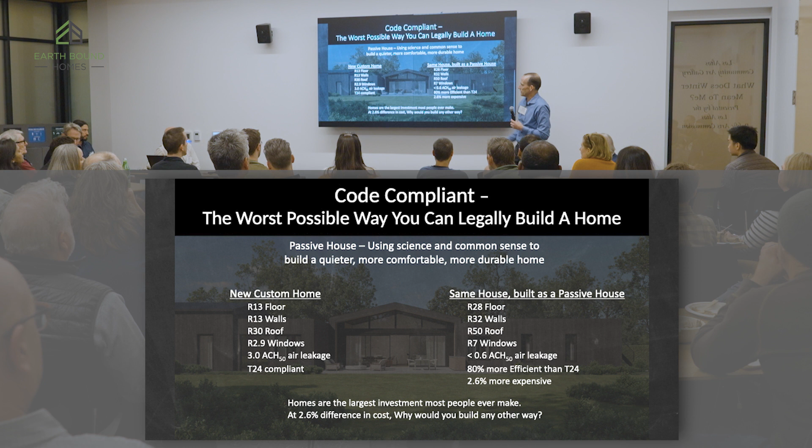Now, this is San Bruno, and I'd say a proportion of our projects now are all electric. And I don't like this - this terrifies me, all this terrifies me. We should be building better.

I know that the Supreme Court just knocked down the all-electric mandate for cities, but that doesn't mean we can't have these conversations with our clients, with our architects, all the time. Talk about it all the time. We don't have any of these conversations with gas combustion.

So we builders have been constantly taught that we're supposed to do what the architects and engineers tell us to do. An architect told me he likes that I don't do what every other builder does - I second guess every part of the construction process. In my opinion, if we want to change how we build and the impact we have on the environment, we have to question everything.

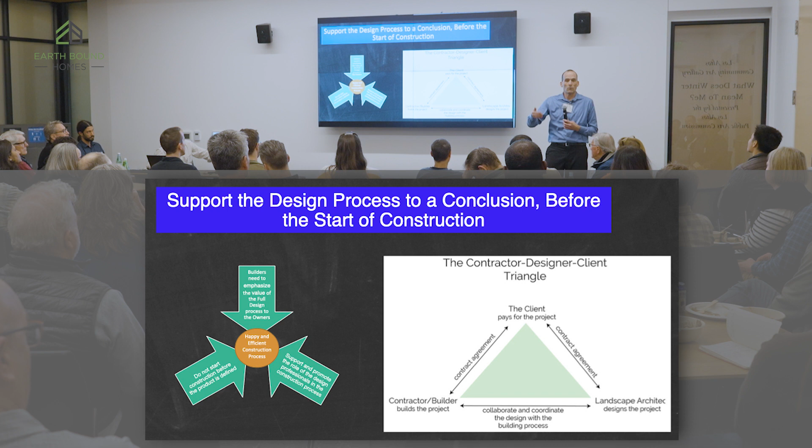It all starts with having these conversations way before construction begins - pre-construction. This is when the architects and engineers are doing all the heavy lifting, and this should be when your clients are making these decisions. If you do it later, it's too late - it costs the client too much money and takes too long. These are two different jobs.

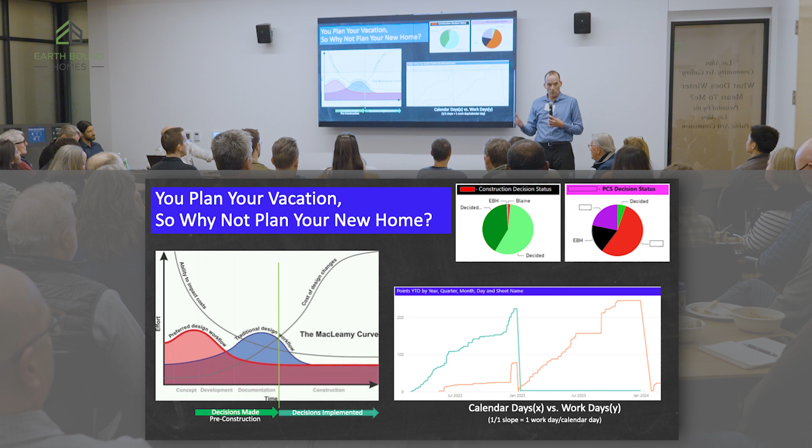Now I'm going to talk a little bit about passive house, and a little bit about the Living Building Challenge. I'm trained in both and strongly believe in those systems, but I don't strongly believe in rigorous adherence to any one system. I believe we can build better projects without getting them certified and spending that money.

This is serious money - we could use it for better windows, better insulation, or better air sealing instead of certification. I'm not saying certification doesn't have its place. What I'm saying is we need to get away from this adherence to certification, or it doesn't mean anything, and concentrate on what we're actually building.

Building better projects is what really matters, and educating our clients - they have options, like upgrading windows to better windows. That's what matters, what we're producing, because certification is just a proof of concept. If your client wants to pay for it, awesome - we're super happy. But we'd rather see you do better projects.

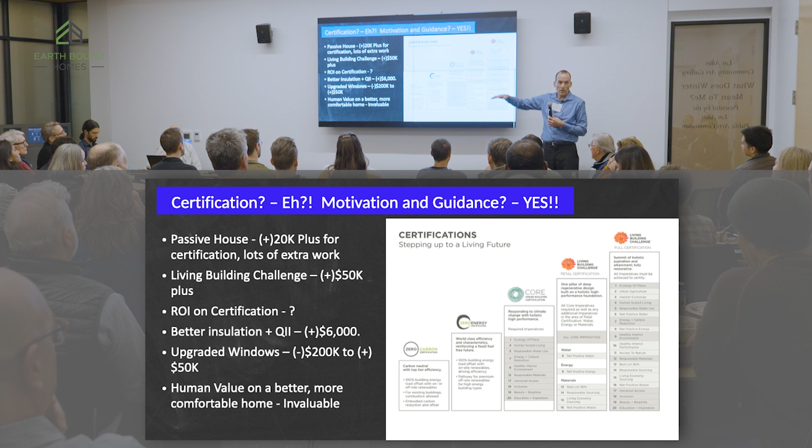There are lots and lots of certifications you can get. This is just the certifications for Living Building Challenge - about 5 of them, and this is the hardest standard in the world. This should be the goal: the best project that your client wants, can afford, and wants to live in, and the best for the planet.

All right, this is my little dinky house. Until you've been in one, you don't really know what it means. Until you've been in a passive house, you don't know. So I'm just asking you to kind of believe in what I'm saying.

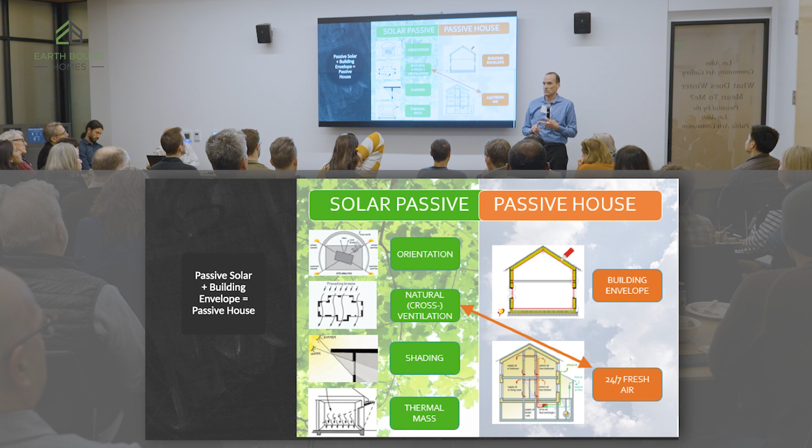Passive house, capital P capital H, is not solar passive or passive solar - it's different. It's solar passive or passive solar with a much better envelope and a fresh air system. It's about an entire organizational structure that looks to build a quiet, comfortable, durable, long-lasting, energy-efficient house that provides fresh air and is resilient to fires, smog, and everything that attacks us in our air.

This is basically about really efficient windows, a really efficient envelope, making sure that you supply fresh air to that house, and having a ventilation system that transfers air. A ventilation system can be opening a window, but opening a window is 100% inefficient at retaining hot or cold air depending on the season. With an HRV, which I'll get to at the end of the talk, it's about changing out the stale indoor air and bringing in fresh air, but pulling the heat so you're not essentially opening the window and losing all that conditioned air you've built.

So this is the Cereza passive house. One of the most important things about any passive house is an air barrier. There's essentially a pencil test: we should be able to draw a pencil all the way around your house without ever lifting it up off the page. That's how you get an air seal.

This is the waterproofing for the basement. David, or Anthony, mentioned earlier that the site of this house has a high water table. We basically have to build the foundation so that it could float, right? And it's too heavy to float, but it literally could have water on the walls the whole time. We're not allowed to pump it off.

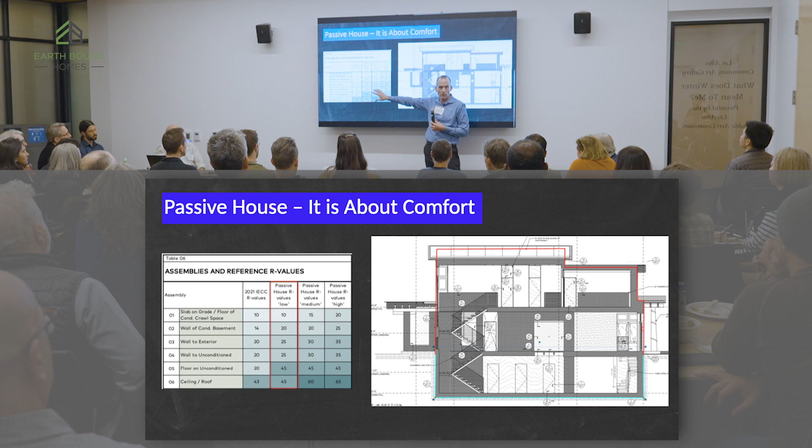I hate Title 24. Title 24 is a complete disaster. With Title 24 for this project, we have a 6.11% compliance margin over Title 24, because Title 24 doesn't understand passive house. It happens over and over that when we do the Title 24 calculations, it doesn't understand what we're building and gives us bad margins. We're having to do stupid things to get past Title 24.

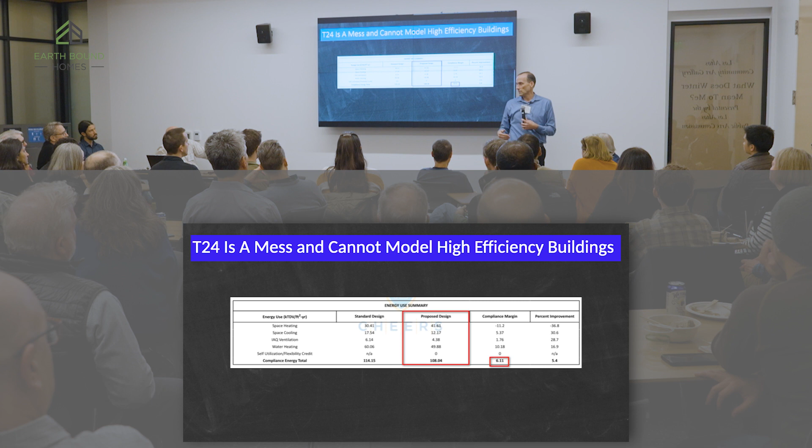What we should be using is something called PHPP, the passive house planning package. It'll give us our loads and tell us how we're in compliance. There's a company out of Colorado called EVU who did the training for me and for all of my people in passive house training. They do something called a boost report—it's like $2,000 to $4,000—that will do the PHPP and give you the whole analysis. I'll show you some of their output later on. It's fantastic, absolutely fantastic. This house performs unbelievably; I'll get to it.

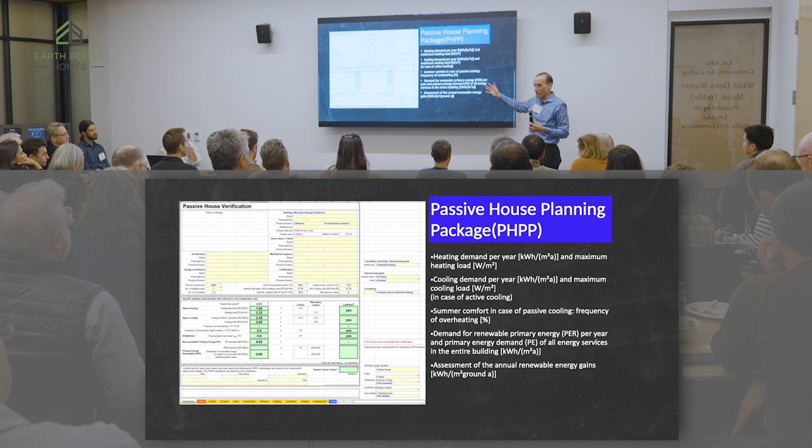So this is like a dream, right? These are the houses that we want to be building. Can we get up and hand out the slides? I strongly believe in active learning, and we're going to do something that Bronwyn and John Stewart did a couple months ago—an active learning session. For about the next 6 or 7 minutes, you're going to get a version of this slide.

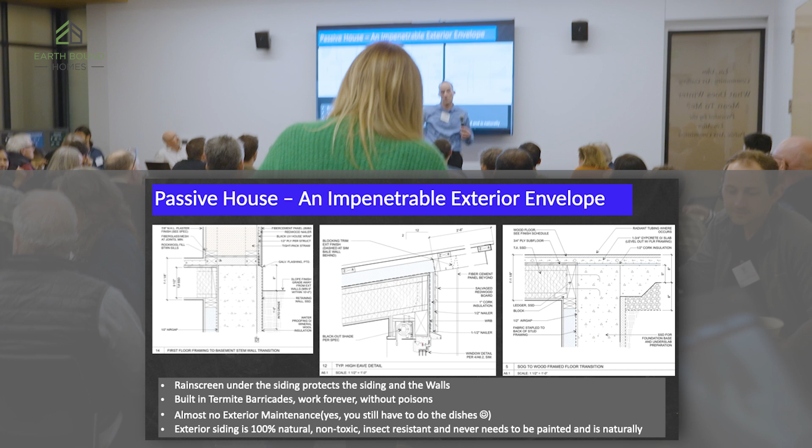What I want you to do is twofold: draw down with the pen on your table the air barrier, so that you stop air from flowing from outside to inside your house. Then draw the shortest line between the outside and inside thermally—what you're looking for is bypasses of your insulation, called a thermal bridge. Does everybody understand that? The reason you're all sitting at tables is so you could talk about it.

Let's talk in class—this is really, really important. This is how you define what floors, walls, or foundations matter most. In this case, we have it going across the interface, because is this a basement or is that a crawl space? The basement is about a wood wall, and here we're up with a wood wall or a crawl space, so this has to go all the way down into the dirt. At some point it connects with the concrete waterproofing below, and it goes up past this junction. I can tell you from experience, this junction is incredibly difficult to intersect—it always leaks, and in a remodel it's a total pain.

This one, we're coming up and then coming over. Why do we place it here? We place it here because look at this—this is a vaulted ceiling. What do we know about vaulted ceilings when we have insulation in the roof? We have to protect the underside, the outside of the air barrier, from getting cold, because if moist air travels up through here and hits this membrane, and this is outside, it will condense, water will condense, and the drain will get wet and rot. So it has to be here. For those of you who said it's going to be up here, you're going to let your membrane get wet from the condensation, and everything below it will rot out.

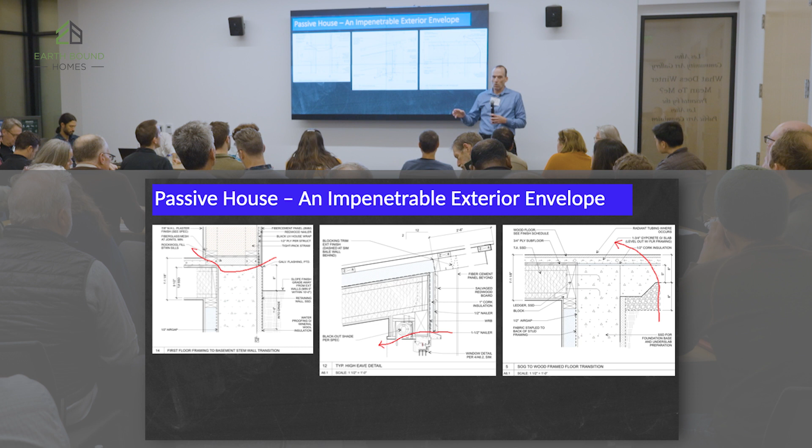It's a stinker because we have our window, our structural header, we have to have a structural header. We have our blinds pocket inside the wall that gives us a straight shot right through our structural lumber and those blind pockets. Blind pockets are really, really hard to get right. If you put a blind in a wall and you don't have exterior rigid insulation that goes over the top of it, then you're going to get thermal bypass. And anytime you have flashing, this is just a super difficult variant.

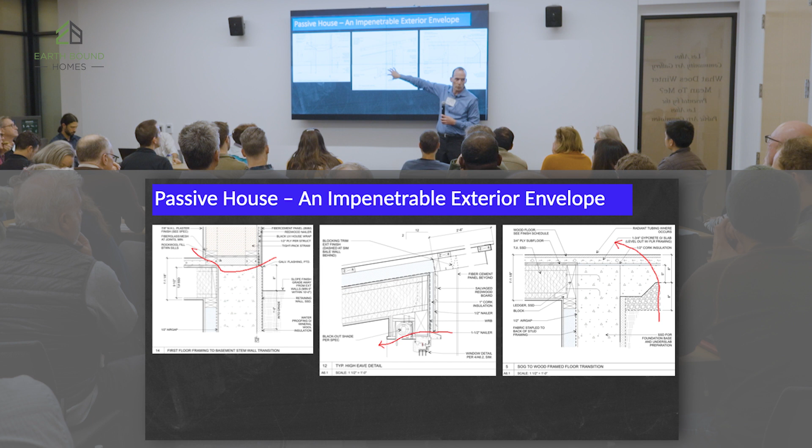It's always hard. And then the last one, we have a thermal bypass right here, pure and simple. So we do have cork insulation, but this is the weakest spot, right? We insulated this, so heat has trouble getting through to the basement, but getting upstairs, it only has to go through a half-inch of cork, right? What's the solution to that? Insulating the bottom of this slab.

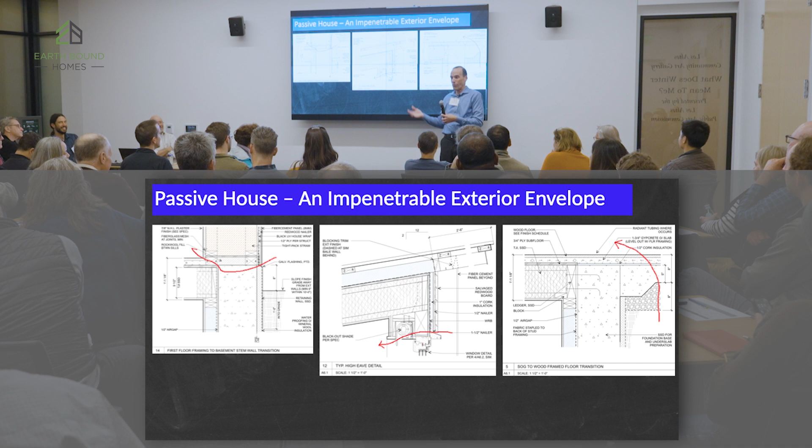So actually I drew it on the slide before. I drew the insulation under the slab because I didn't verify it. But yeah, this is hard. We have to think about each one of these details, and like I mentioned earlier, every job is a prototype. Every job gets a little bit better. Our first passive house, we struggled mightily. Our second, better. Our third, better. Next slide, please. Don't expect to get everything right the first time.

Okay. This is the Living Building Challenge. I love the Living Building Challenge. It's basically impossible for any infill project. To get full Living Building Challenge, you have to be water independent. Forget about it, right? You're not even allowed to collect water in some places. And even if you did, you'd have to put a giant tank underneath your house to collect it all, okay?

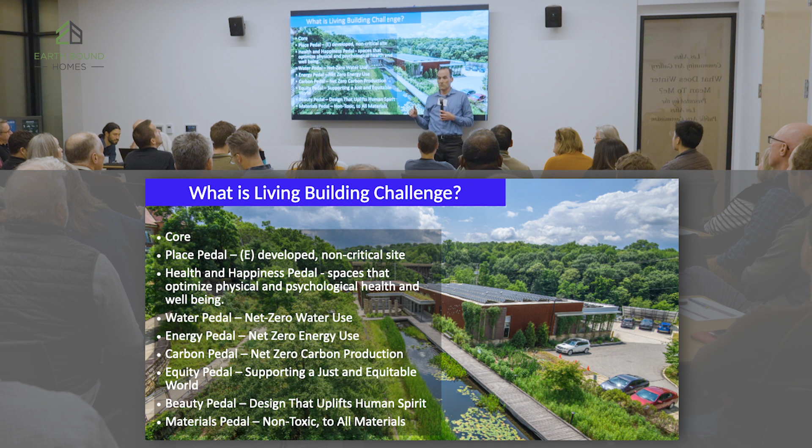So we have an intern who is a fantastic human being, and last year she built a tool for us to look at all of the materials we're using in our company and see if they had red list chemicals. This is a lot of work. So not only is the tool absolutely awesome, but some of this stuff, like Rust-Oleum, we got all these other products, and this Rust-Oleum pops out as high red list chemicals. It's a toxic chemical.

One of the most surprising, for you structural engineers and builders, is SET epoxy, which is the epoxy they use to anchor hold downs into concrete. It's like 40 to 60% red list chemical. Think about that. 40 to 60% toxic chemical. And I would talk to Anthony or any of my other structural engineers. I don't know if there's an alternate material. I would love to use another material that doesn't introduce 40 to 60% red list chemicals in our products. Next slide.

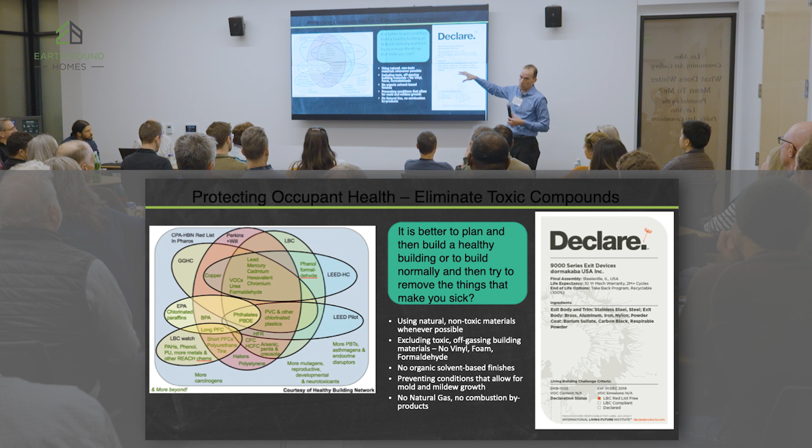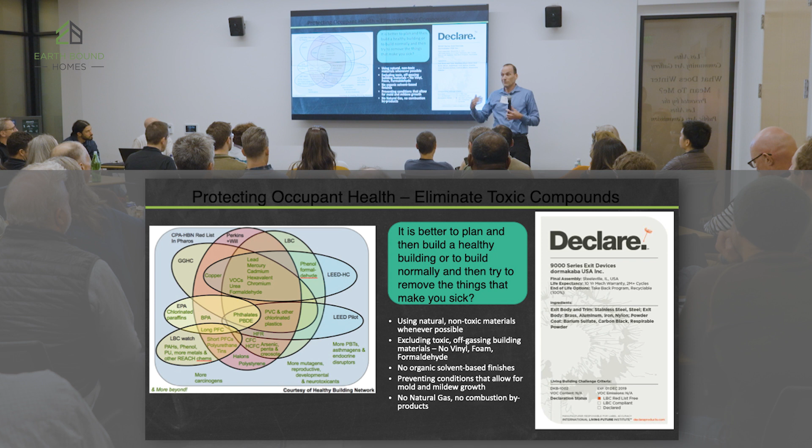It is a lot of work. Somebody the other day goes, why are we responsible for doing this? Nobody else is doing it, right? Because there's a need and we need to do it.

Next slide. The red list, if you're not familiar, is the Living Building Challenge way to certify materials for toxic chemicals. It's like 21 families, about 11,000 chemicals, and growing every year. We can look them up through CAS numbers. That's what the tool does. We have the tool on our website, but I didn't like how it works, so we're going to try to rebuild it and make it easier. Let's put that back up.

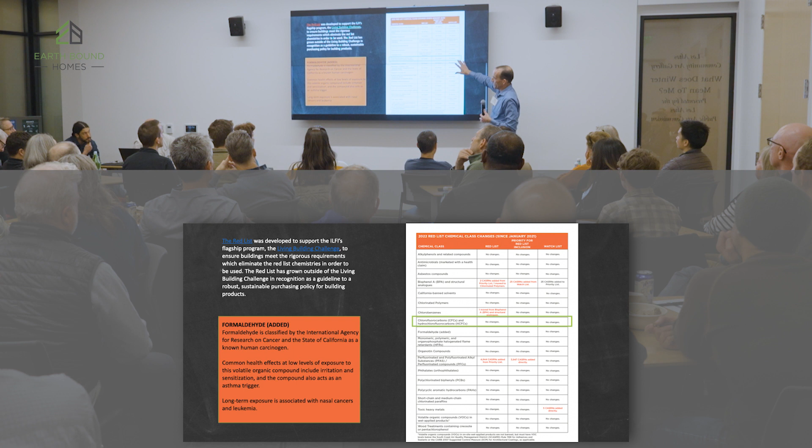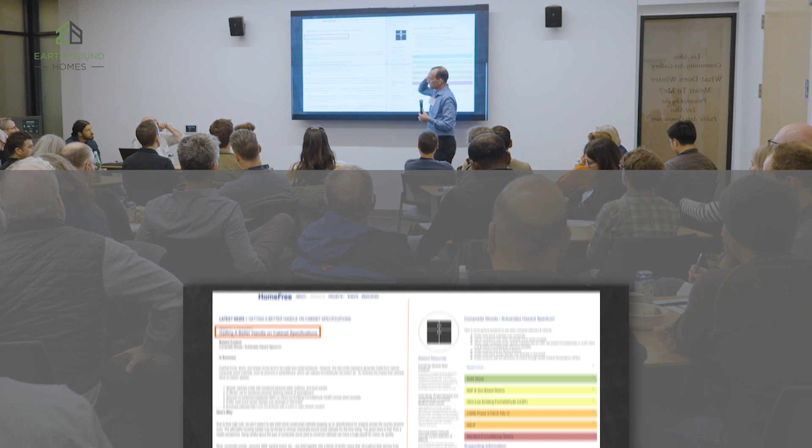Next slide. You can also go to websites like HomeFree, like Mindful Materials. These are great websites for looking up materials. Mindful Materials, unfortunately, is mostly commercial materials. I'm a bit bummed. HomeFree is actually better. They've done a great job. Next slide. You look up a section, for composite woods, and they give you basically green, which is good, all the way to red, which is bad. Very easily. So if you click on this next slide, it'll give you this list.

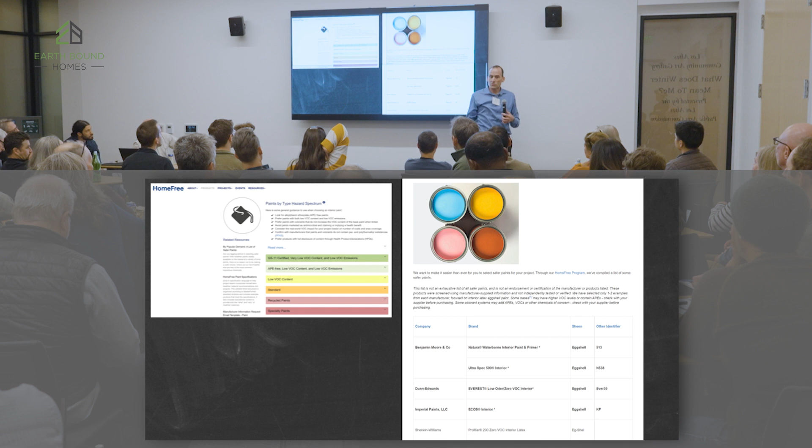So click on this green, it gives me this, and these are the ones that are actually good for you. So right now, very easily, if you go to this website and say I want to use a paint, I can say, oh, this paint fits this good green category, right? There's resources out there. They don't cover a lot. Next slide. And they require a lot of work.

You have to be willing to talk to other people. You have to be willing to share resources. We're trying to aggregate. We're one small company. We're doing everything we can to put this information out there, but it's a lot. But you also have to, to quote Apple, think different. You have to go into every step and question what you're doing, why you're doing it, and if it's the best way. So this is the first time when we went, why are we using pressure-treated lumber for the retainment for these temporary walls?

Yes, it's called soldier beam shoring. But why are we using pressure-treated lumber? Pressure-treated lumber is so that the lumber doesn't rot out and turn to mulch. But you're leaving it in the ground. You just basically leave it in the ground and it rots out. You want it to rot out, right? You want this to be just mulch in 10 years, right?

And if you put PT in here, modern-day PTs are water-soluble. So we have water-soluble chemicals that we're now putting into an area with a high water table that are going to leach out of that wood forever, poisoning the ground around this house. We can do better. And this wood is cheaper, right? Why did I never think of that before? This is not rocket science. This is just paying attention to things that we just didn't think about before.

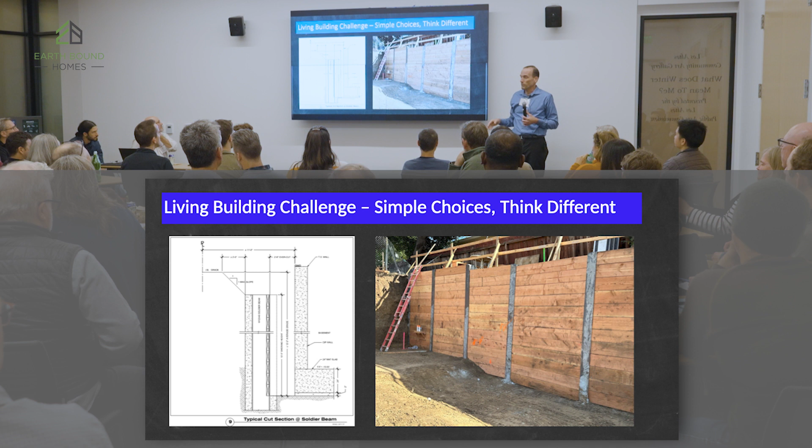Here's another one. Everybody knows, or at least if you don't, you will right now, PVC is toxic. The manufacture, the disposal, and the burning of PVC produces a chemical called dioxin. Dioxin is one of the most potent toxins known to man. And we put it throughout our houses in sprinkler systems, and we have water sitting in these sprinkler systems for eons, leaching the chemicals out of this.

What's the alternative to this? Copper systems, right? We have started to introduce copper fire sprinkler systems. It's about a 20% increase in the fire sprinkler system price. Very easy to get rid of a toxic chemical out of our projects without introducing anything except a little bit more investment in a fire sprinkler system, which is already like cheap insurance, right? Just thinking a little bit different. Next slide.

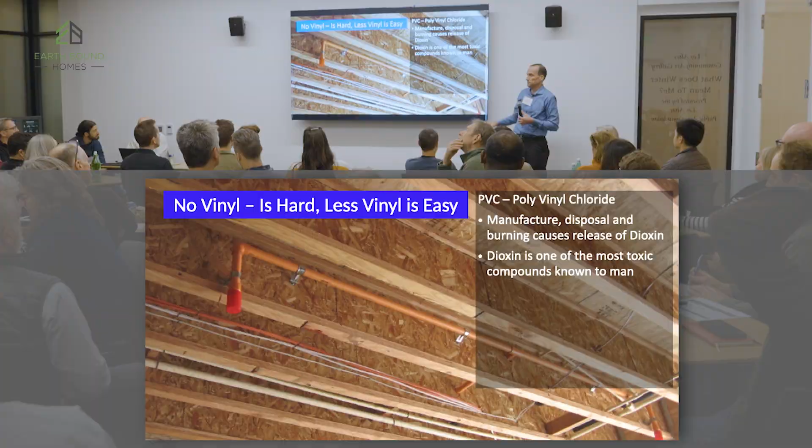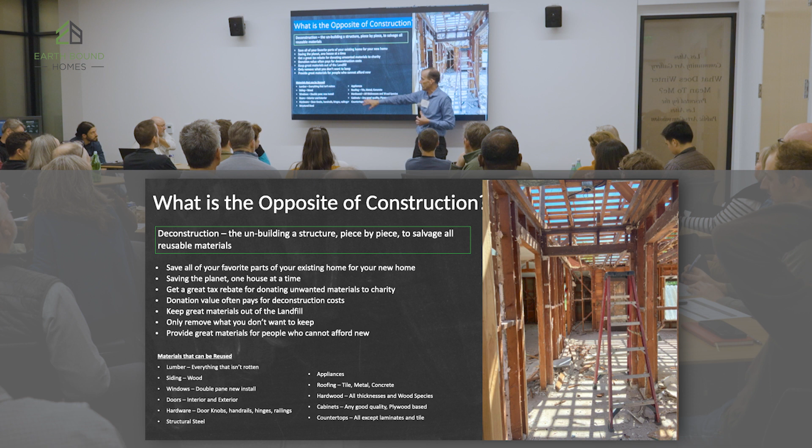So first we planned, now we built. So what about this project is so amazing, Mike Clay? First of all, deconstruction. The City of Palo Alto requires deconstruction, which means that you don't get to drive an excavator or a bulldozer into the front yard and drive it out the backyard with a dump truck, right? So you have to take it apart piece by piece. There's a lot of materials here that you can recycle. Next slide.

The labor to deconstruct costs about twice as much as the labor to demo and the dumping costs, right? So what do we do? How do we make this a better process? On this project, and on subsequent and previous projects, what we do is, first of all, call an appraiser and say, hey, is there anything of value in this house? And if they say yes, then we tag it, we have a deconstruction company pull it, and then we donate it to a deconstruction salvage company, which then gives us a tax break on that material.

If they say no, then we call a company called Full House Building Supply. Full House Building Supply will come in and go, yeah, I can do this. Then they'll go around, take pictures, and have a sale. The owners are out of the house, so they're not coming in while the owners are there saying, no, I want that TV. They're coming in and basically selling it for fractions of a dollar, all the stuff in the house that anybody wants.

People come in and take it, they sign a waiver so that you're not liable if they get hurt. They take all the stuff, and what you're left with is the stuff that nobody values. There's value, but not value to anybody in this area. So now you've reduced the amount of deconstruction material you have to take down, the deconstruction bill goes down, and you've disposed of less. Next slide. So what does that mean?

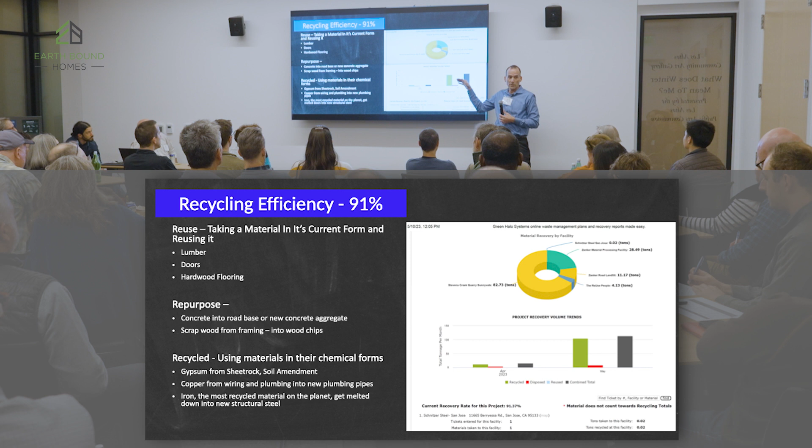91% of that house was salvaged or reused. 91%, that's including the foundation. 9% of that house went into landfill. We took it from 100% into the landfill to 9% into the landfill. That's a freaking good deal for the environment and for the climate and for the population in general. Next slide.

So Anthony talked a little bit about it. We have been using a 70% replacement concrete for 14, 15 years. This is the recipe. You guys want a 70% replacement? I'm happy to share this with you. We have 3,000, 3,500, 4,000, 4,500, 5,000 PSI, 70% replacement concrete. It is a little bit more expensive than no replacement concrete. It is a better concrete because it gets stronger over time.

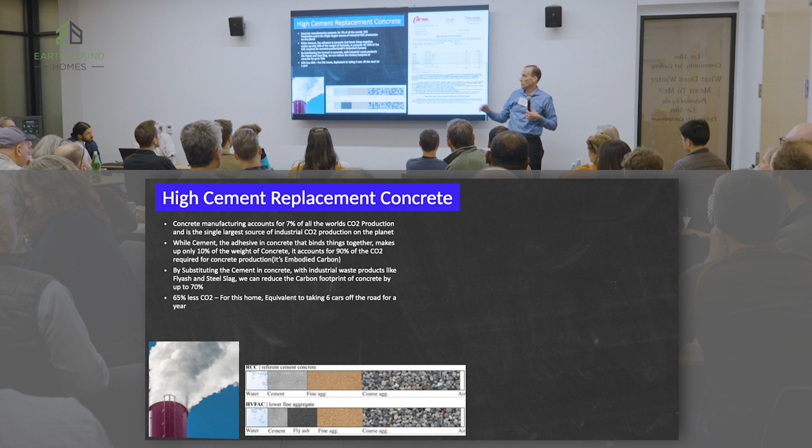So next slide, please. This is fly ash. These are holding ponds, and you see this right here, this is a coal-fired power plant. All these bays are where the coal plant scrubbed their stacks, pulled out the fly ash, and then stored it in ponds right next to a river. And every once in a while, these ponds break. They flood their fly ash, which is filled with heavy metals, into the waterways and overwhelm houses, right?

So selenium, arsenic, boron, aluminum, lead, mercury, chromium, radionuclides, uranium, and thorium. Right? Those are heavy metals. Those are not good heavy metals. Next slide, please.

I'm losing it. Slide. Go back.

So we take this. I don't know where that slide is. I'll probably get it later.

So we take that fly ash, we use it in concrete. And what happens when it gets used in concrete, it offsets cement, and it becomes part of the concrete mix. And what happens to all those heavy metals? They get fixed in the concrete. These are bioavailable heavy metals, that means that if you were exposed to them, you could absorb them, eat them, breathe them in. When it's a part of concrete, they are no longer bioavailable unless you're into eating concrete. Right? Next slide.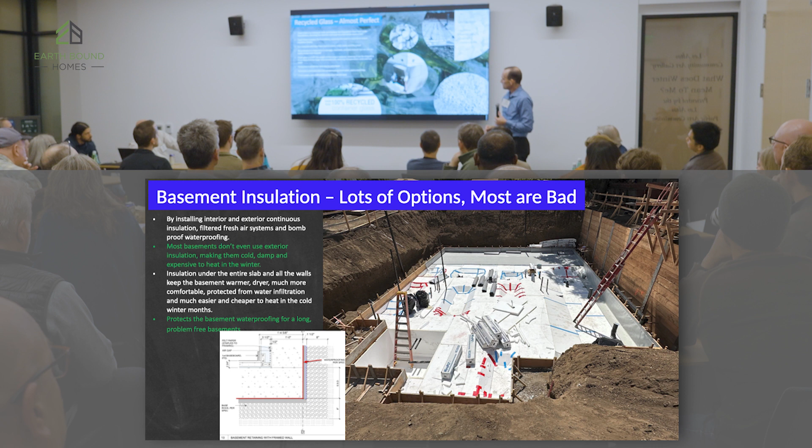So now we're up the wall. We would like to not use petroleum products for insulation. And so there's this material. There's a manufacturer called AeroAggregates that produces an aerated recycled glass. So essentially they take a bunch of recycled bottles, they melt it, they blow a bunch of air in it, and they form these glass aggregates. Just like petroleum-based foam, they have little air bubbles in them. You can see the structure in here. So that actually gives you an insulative value. I think it's about 1.9 for this material.

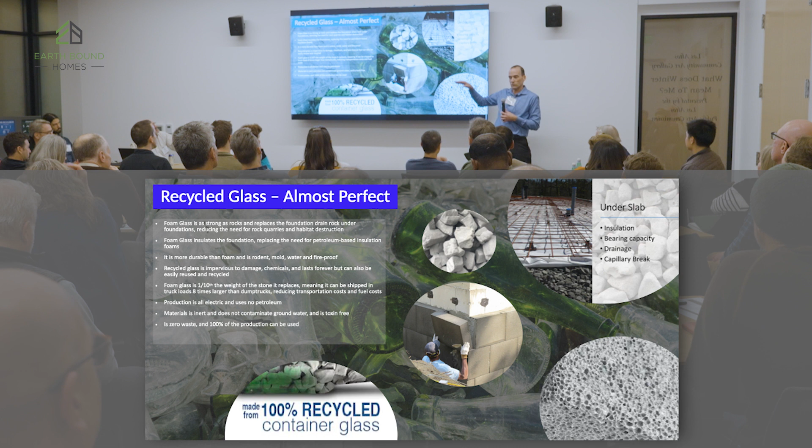This material is an engineered, designed product, so it's a structural product. This material, unfortunately, is made in Maine. And so for us to use it on our project, we would have to truck it from Maine to California. And it's not just one truck. I think we counted it was 7 semis to use this product, right? Urban Chill had a much better idea. So we couldn't use it. Let's go back a slide. Okay.

So pumice is not a man-made product. It does not have engineering specs. We cannot put a giant heavy building on top of pumice because we can't make sure that it's not going to give up, that it's not going to crush at some level, and that's bad. Clients typically like their houses flat. And so what we did is we replaced the aggregate for the rock that we use for the backfill on the house. So instead of digging up a mountain and bringing heavy rock truckload by truckload, 7 yards at a time, and placing it on the outside of the foundation with the insulation, we replaced all but an inch of this insulation.

So this insulation is polystyrene insulation. It's here just to protect the membrane of the waterproofing behind it. Remember, this product is basically designed to sit in a giant pond of water with water going way up the wall. That membrane has to be perfect forever. We use a little bit of that foam insulation more as a bumper until we backfill with this rock. This rock has an R value, about one per inch. So we have like 18 inches of it, so we have an R19 to R22 of insulation on the outside.

We replaced the heavy rock. We use the pumice to do that. And we've also given the water that comes up here a way to percolate and go down, right? We've taken a natural material, similar to the straw, and offset what could have been a much more environmentally damaging material called foam.

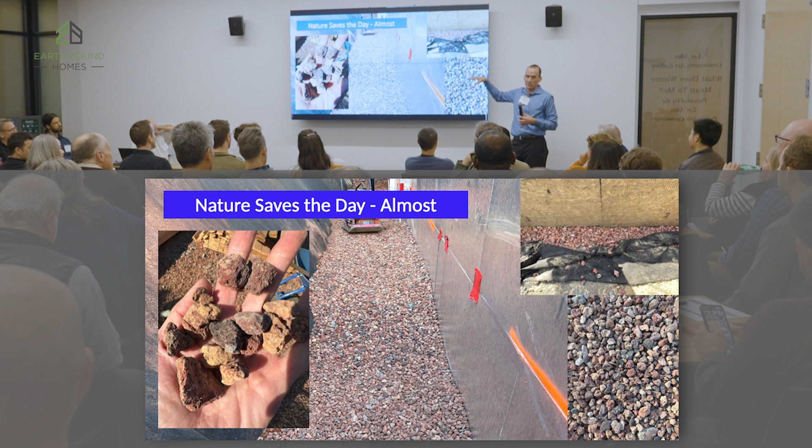Not very far from here. We actually got it locally. Yes, with a landscaping company. There's lava fields all over. Next slide, yes.

I have one project where we replaced some of the rebar. This is fiberglass rebar. It has a fraction of the embodied carbon of steel rebar. It's a little bit more expensive though. Actually, during the middle of the pandemic, it cost half the price of iron rebar. The challenge with fiberglass rebar is that it doesn't have the bending resistance. So if you bend it, it can break, whereas iron doesn't break. And we live in earthquake country where everything bends in an earthquake, right? So we could use it, but it has to be strategically designed. Any amount of offset of iron rebar we should take.

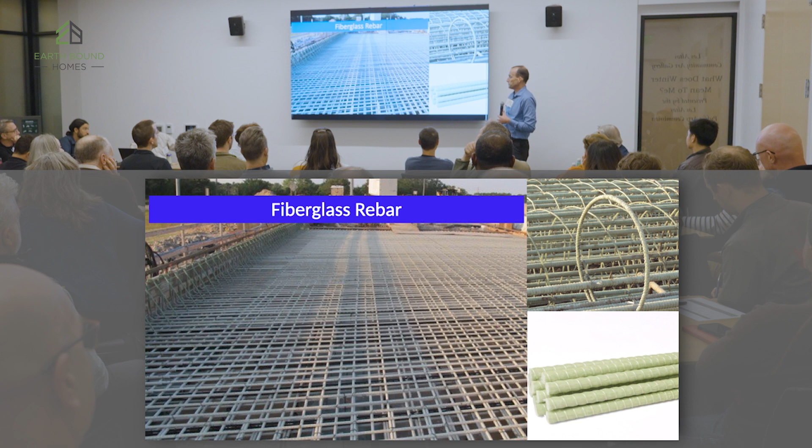And next slide. All right. So I would show this to Anthony.

So he's just going to have to hold his nose while I talk about this. And all the rest of the structural engineers.

So we design houses, or Anthony and the rest of the structural engineers design houses to withstand earthquakes. When you design a house to withstand earthquakes, you have to specifically design the foundation for the load of a completed house in an earthquake of a certain size, for racking and not falling apart. The common number is 28-day strength. Okay, so these are three.

Because you don't build a house in 28 days, right? Has anybody else here built a house? Maybe you've gotten some of your framing up, but you're not building a house in 28 days. We have the ability to change how we think about structural engineering, about getting a 56-day strength and making sure that's okay. Next slide.

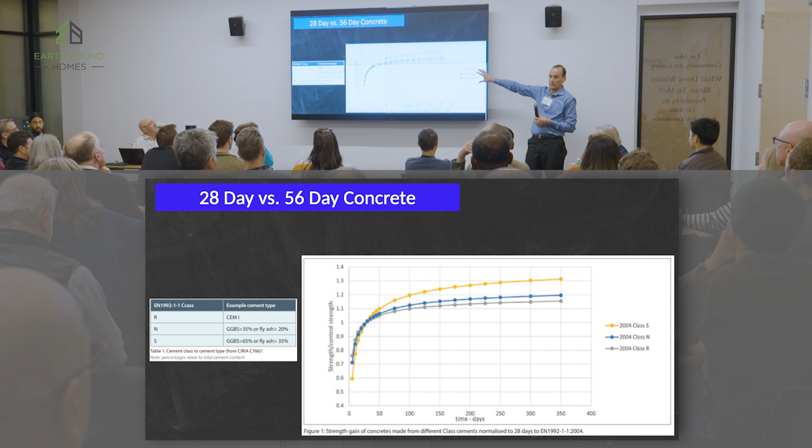So this is radon country. We live in fairly medium radon country. Radon is a radioactive gas you get exposed to in any house with a crawl space or basement. We should use a radon system, even a passive radon system, in every project we build with a basement.

You know how they found out what radon was? There's a guy working at a nuclear power plant who went home and forgot to take his dose monitor off and leave it at the plant. He went home, came back, and he lit up hot. They went to his house thinking, is he smuggling radioactive material home? They went down to his basement, and it was filled with radon.

Radon causes lung cancer, amongst other cancers. So we could easily just put a pipe into our crawl space, the areas underneath our slabs, and then test it like 6 or 8 months after. There's an easy test for radon.

You test it, and if you have radon, you put in an air pump—essentially this is a dryer booster fan. Now you get radon out, and you never let the gas pressure build up. If you have a crack in your foundation, you never get radon into your house. It costs almost nothing—the test is like $49.

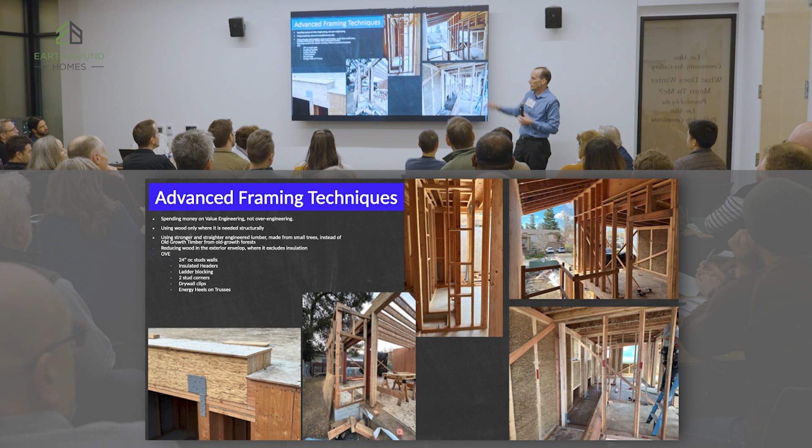24-inch on center framing, in the non-bearing walls that don't have big old 4x12 headers—we can do this just by paying attention to detail. Next slide.

We don't use any dimensional lumber over 8 inches if we can get away with it—we have to have a conversation with the structural engineer because they have the final say. These are two giant beams: this one is made of small 8 to 10-inch trees, while this one has to come out of a tree that's 150 years old—old growth. These small trees reach maturity in 17 years, and unless it's structural, this beam is actually stronger than that standard beam. Next slide.

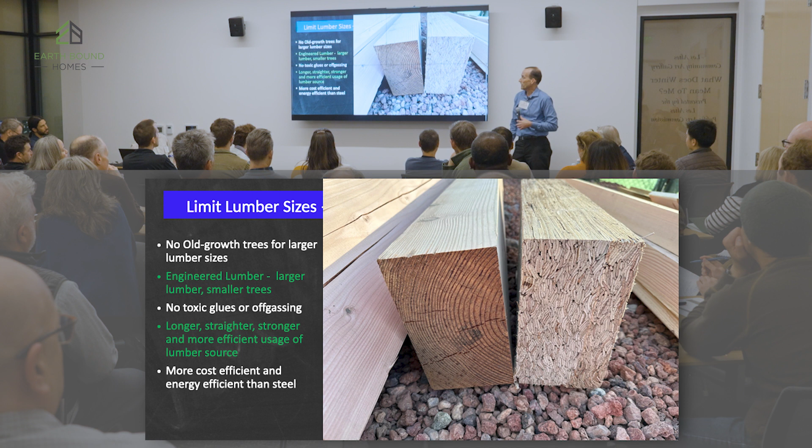Yeah, no shrinkage, exactly right. All right, we're trying to get rid of all toxins in-house. Sounds like a fairly rudimentary kind of conversation, right?

Of course we get rid of all toxins out of the house. But what are we constantly putting in houses at the bottoms of the walls when they touch concrete? Pressure-treated lumber. So we've used TPO, which is just a piece of roofing material. We rip it into strips and put it under the plates to stop any water movement from the concrete into the floor. We've gotten rid of all the pressure-treated lumber in our house. Now we don't have to use special hardware resistant to the toxin in pressure-treated lumber. This is essentially free because this wood is cheaper than pressure-treated lumber.

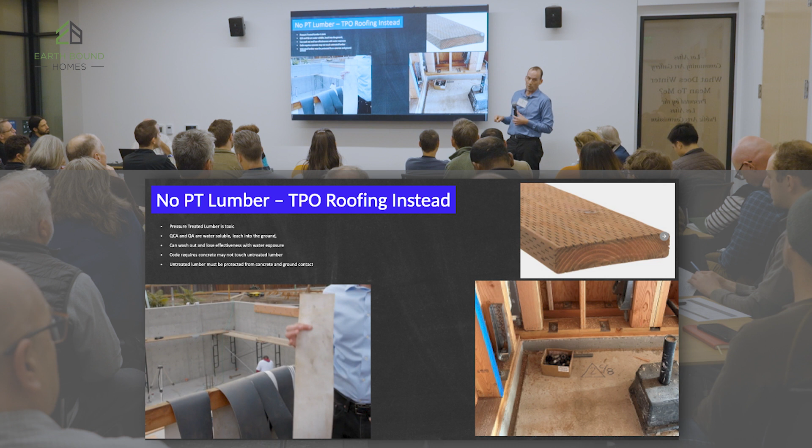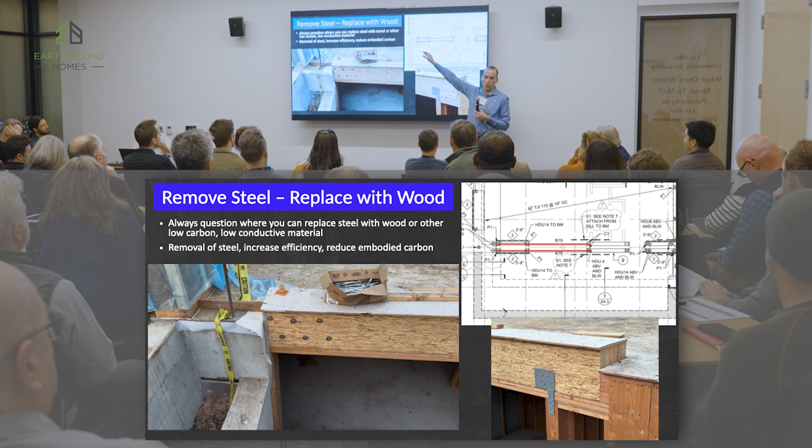Again, the moment frame, thermal breaks. See how this steel beam, we actually have a little bit over on this side. This steel beam is embedded in insulation, so no thermal bridge. This right here, this used to be steel, and that used to be steel. We got rid of them and made them wood, working with the structural engineer and the architect. Now it has to be wood, it can't be tall, right? I mean, these are very, very heavy windows, 15 feet tall, but we reduced it so now we can do it with wood instead of steel, which has a conductivity that's 300 times worse than wood.

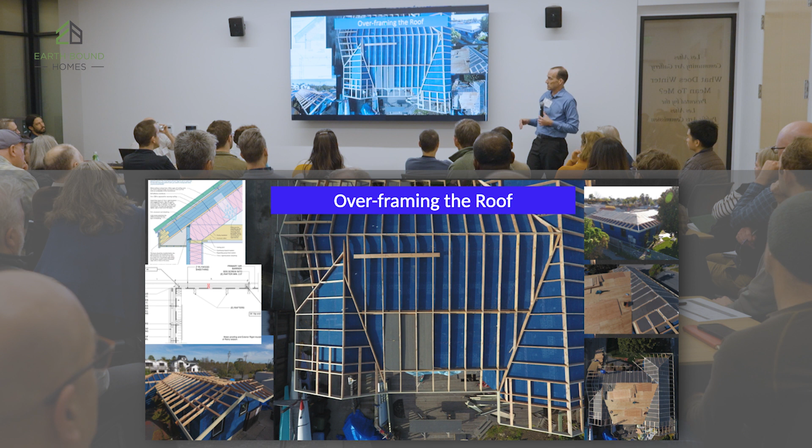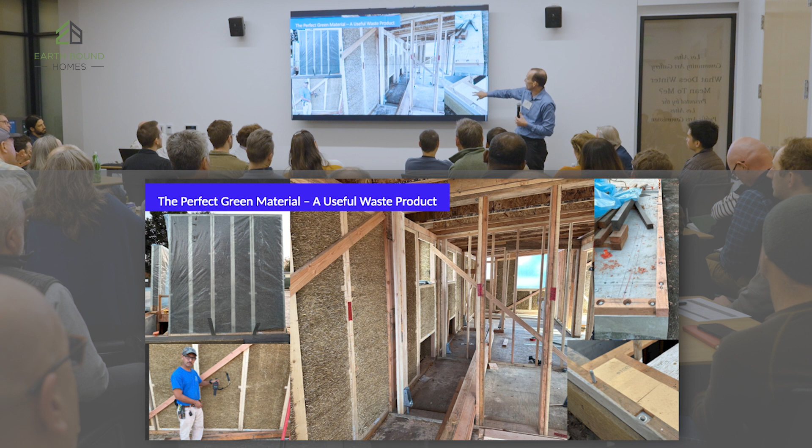I really hope you guys come on April 20th to the house, because we'll have the windows in. I was up in this house the other day, and there's no windows, and the whole front of the house was open. I went into a corner where there's straw panels on both sides, and it is wicked quiet. I don't know what it is about the straw, but it absorbs sound—it's amazing. I can't imagine what this place is going to be like when the windows go in.

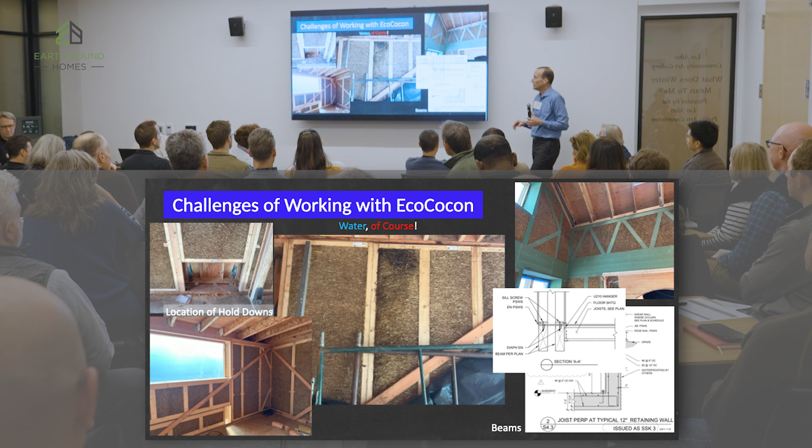Next slide. All right, detail from that itself. So, next slide: Forest Stewardship Council, FSC, or SFI, Sustainable Forestry Initiative.

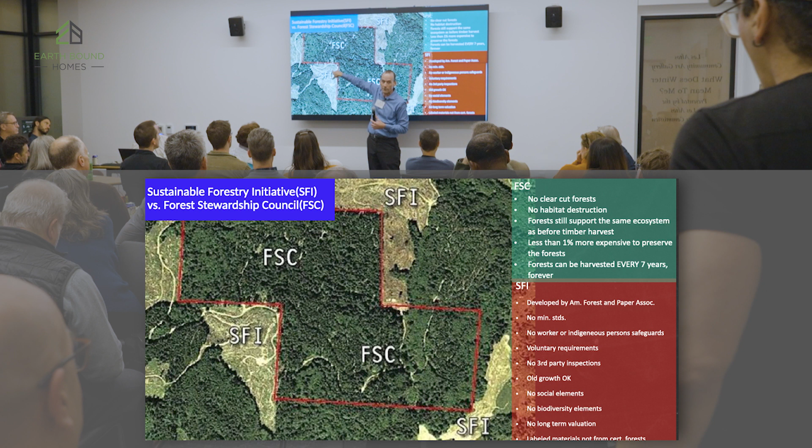I'm not going to get into all of it, but FSC is the real certification. We buy all of our lumber FSC certified. SFI we see all the time—it was developed by the American paper and pulp industry to essentially offset the value of FSC. Please make your choices wisely. You have to order ahead for FSC; it's not supplied by everybody, but it makes a difference. This is FSC forest, this is SFI certified forest—there's a huge difference, actually.

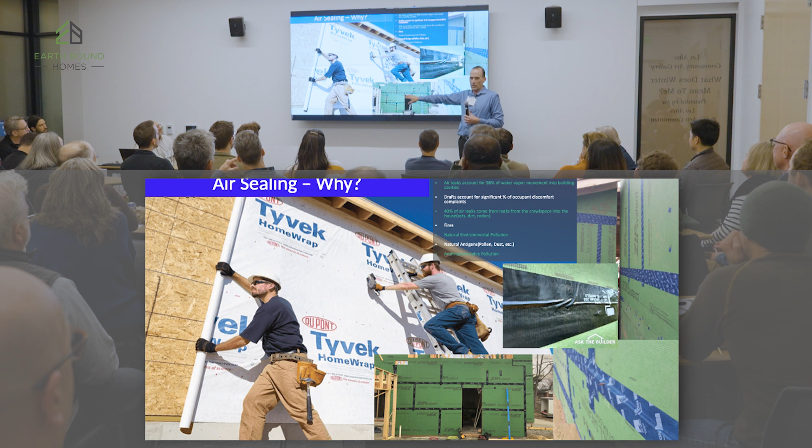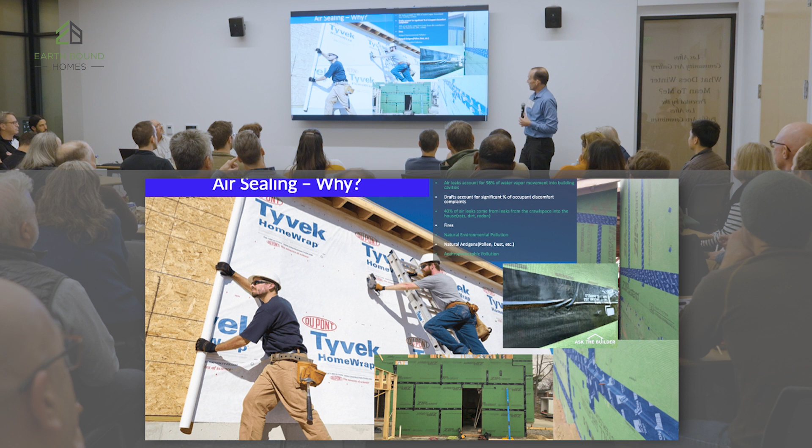I'm a huge fan of peel and stick waterproofing and air barriers. Why is that? If I was to come over to this wall, and this is all stuck to the wall, and I had one cut right here in the middle of the plywood panel, the only air that would leak out would be from any seams radiating from that little cut. If this was a Tyvek wall, as soon as I penetrated it anywhere, air would run around inside the Tyvek until it hit an opening and went inside the house. This stuff is bomb-proof—it's fantastic, and it makes air sealing so much easier. Next slide. It also looks cool.

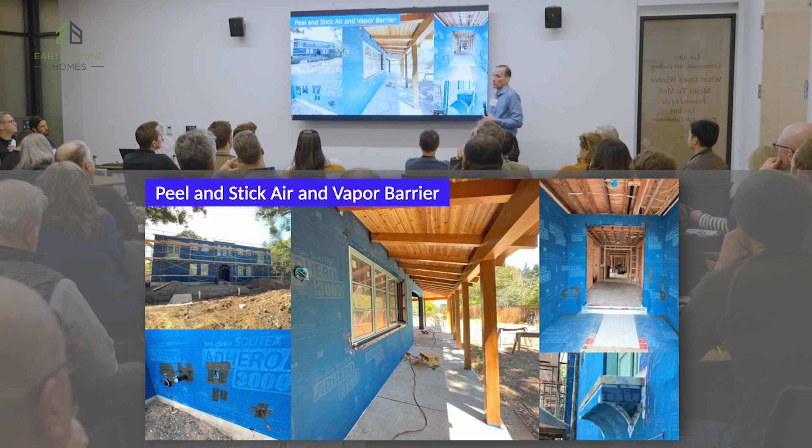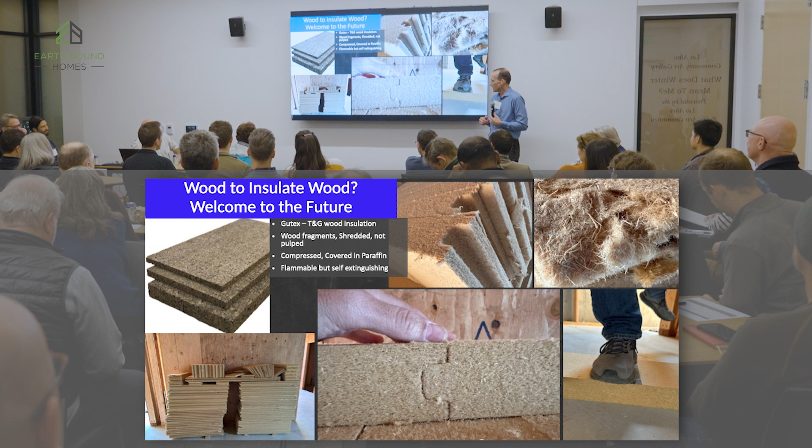Rain screen. If you're building or remodeling your house and not putting a rain screen on it—basically just a little gap between the siding and the wall—you're doing a huge disservice to yourself. Once you put your siding on, it's impossible for water to jump across that inch or half-inch gap and get to your insulation or your wall, the WRB. It falls down and is directed outside.

If you're residing your house, this isn't a huge add. Underneath this siding is the insulation, and I put another waterproofing barrier over the top of it. So basically, water would have to be driven by a jet to get into this cavity. This is forever, right?

We just got done speccing windows for a project and had three bids. We had Zola windows, which came in at $350,000—that's a big one. We had another American manufacturer at $425,000; Zolas were R7, the other was R3. And another California manufacturer at $500,000, also R3. The client didn't choose the R7 windows because of the settings.

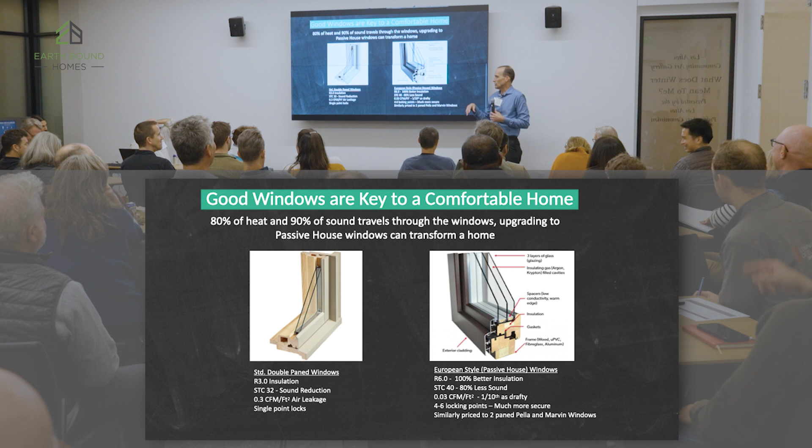Next up. All right, these are the windows for this project.

They're like an R7 point at the spacer, like an R7, for no more than a Pella and Marvin window—right, like a standard American window. These are freaking crazy amazing. Next slide.

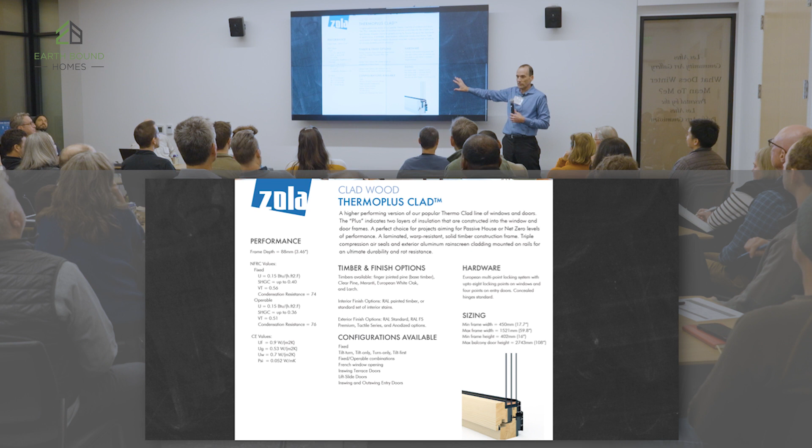Again, you can put these in giant window walls in the snow, and they're triple pane, super quiet, and airtight. They have one-tenth the amount of air infiltration that a standard American style R3 window has—90% less air infiltration.

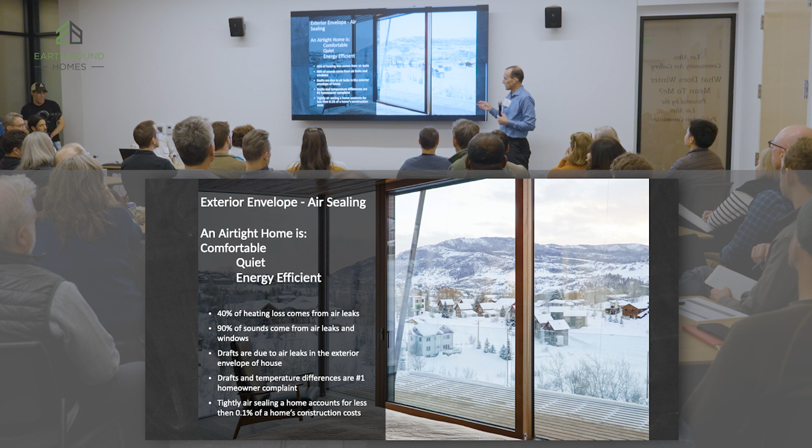Next slide. Now, with passive house windows, passive house doors, and straw panel doors, it makes a difference where you put your window. Most windows in American houses are put on the outside of the flange, sitting on the plywood, with siding on top. This is the delta in temperature between inside and outside at the window—13 degrees versus if you put it in the middle, it's 16 degrees.

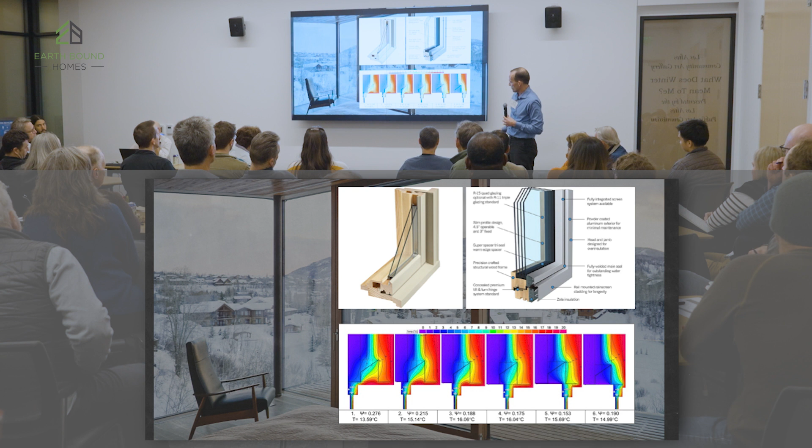Anyway, I don't know why the numbers are off. To make a test—there's typically a 6 to 8 degree difference on a thick wall house between windows in the middle of the wall versus windows on the outside or inside of the wall. I don't know why the numbers should be cut; it's probably Celsius. Next slide.

The 2.6, all right—air sealing and the window box. When you have this wall, it's 16 inches thick, so you can place your window anywhere you want. If the client wants a nice window seat, you can put it to the outside; you take a little hit in energy efficiency, but now the client has a 12 or 15-inch deep window seat. When they get installed, the best thing we can do is flash them really, really well, and even better, put a roof over the top of them to protect them from the elements and also shade them in the summer.

I know this sounds crazy. Flashing material. Flashing material is really important. Flashing material not only directs water away from the window and door openings, but this is a detail that uses a flashing that comes out over the top of the window. This is an incredibly crucial point of any water infiltration process, of getting it right.

And if that flashing is made out of stainless steel or a highly conductive metal, you actually get a much faster heat transfer through, right? So maybe we can find other materials. Now, it has to be metal here to resist sun exposure, but we could find other materials or place that flashing in places where we're not conducting a lot of energy through the bolts. So they play.

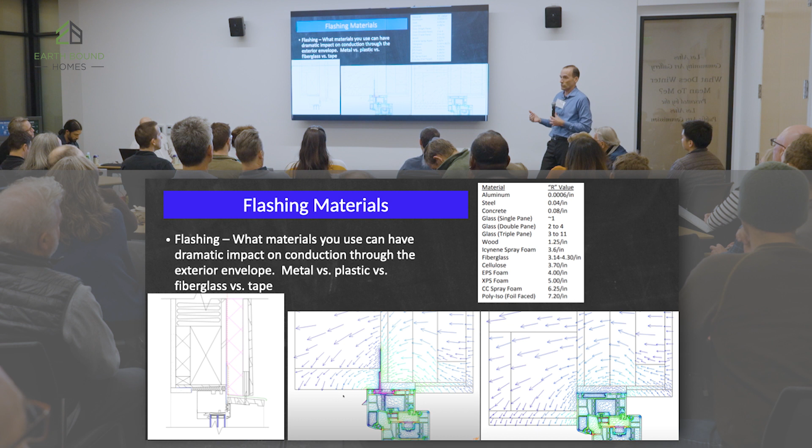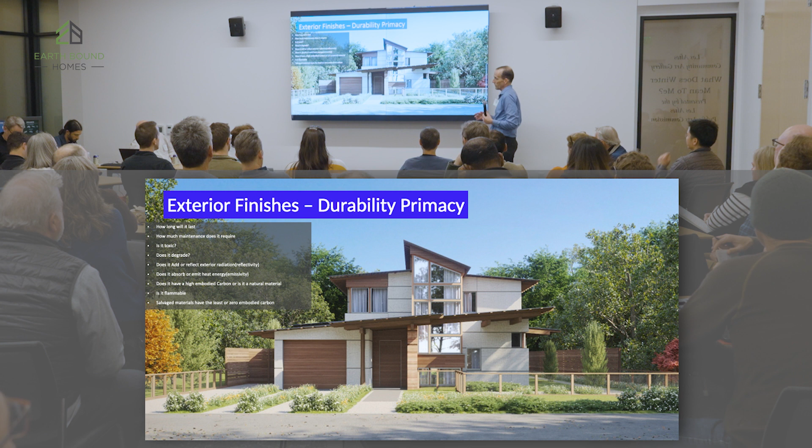Durability of exterior finishes is one of the most important things. Nobody wants a house that lasts 10 years or 20 years, right? We want a house that lasts forever. Next slide. But we also want to make sure that when we're speccing materials, we're also paying attention to what's in those materials. So we had the original spec for this roofing material, and thankfully, we were doing our Red List testing on that process, and we called the manufacturer, because the Living Building Challenge has a threshold of 100 parts per million, right, per million.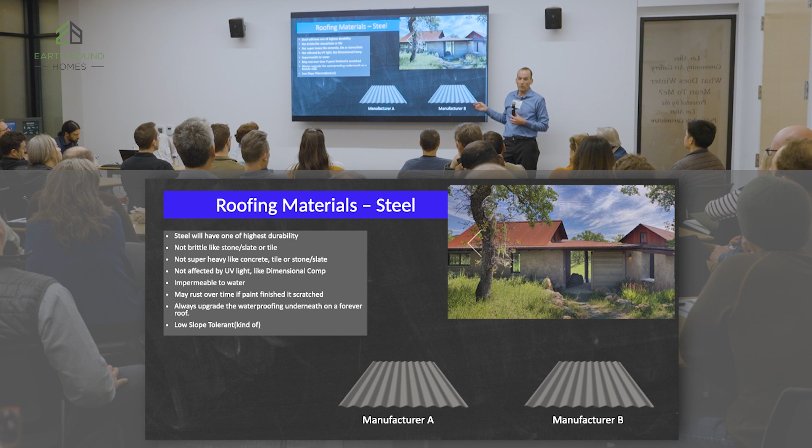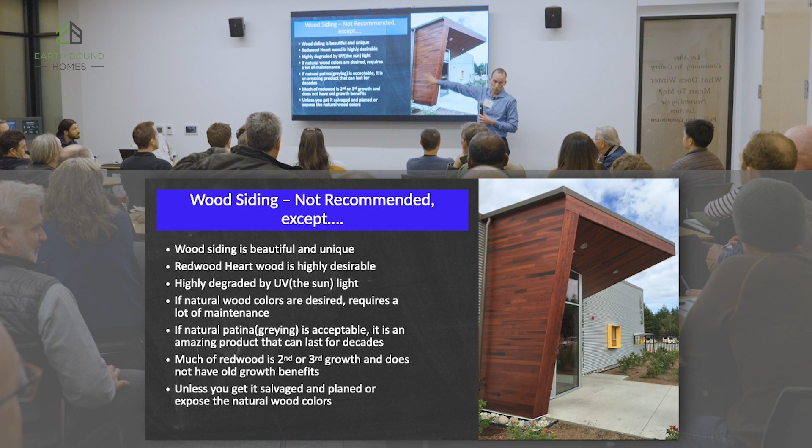So Nathan already mentioned this. I still love the story of the recycled redwood. The redwood, first of all, is absolutely gorgeous. It comes from a Nike facility. I talk about going from a place of plowshares to wherever. I love it. We have to understand that redwood is not a forever material, right? It will eventually get gray, and if the client is okay with that, awesome. If the client is not okay with that, they have to be okay with maintaining that redwood for the life of the house. Next slide.

How do I know this? My house in Santa Cruz on December 4th got to be 78 degrees in the south-facing room. I haven't turned the heat on this entire year. It's been between 68 and 70 degrees the entire winter long without the heat on. So it's been fantastic. But 78 degrees in a room is a little too much, right? And so we need to think about shading strategies.

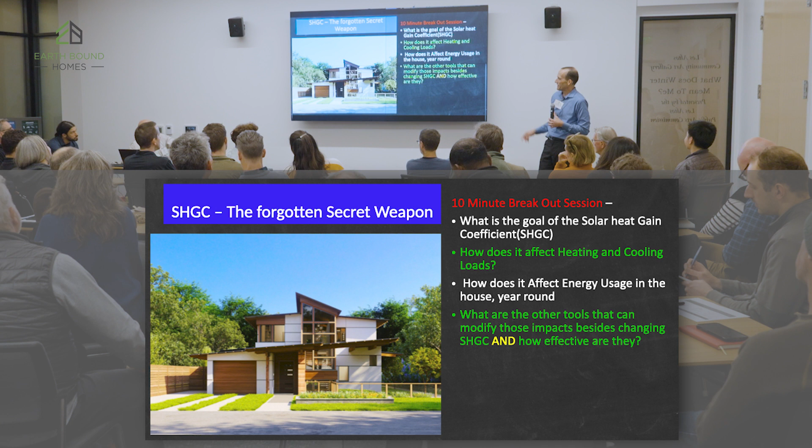So this is that report, that energy reporting. Low solar heat gain glass, medium solar heat gain glass, high solar heat gain. So this is going to let a lot of light into the house in the summer, cooling demand, right? So if we get a lot of light in the summer, so this is very good windows and a medium level or a low level of insulation, low level of passive house, right?

If we had high solar heat gain glass, we can get 49% higher energy usage for cooling than we want to get for passive house. If we use a low solar heat gain glass, we get 50% less. There's 100% difference just from the SHGC on that glass. So then you're saying, well, what's the impact on winter heating? Next slide.

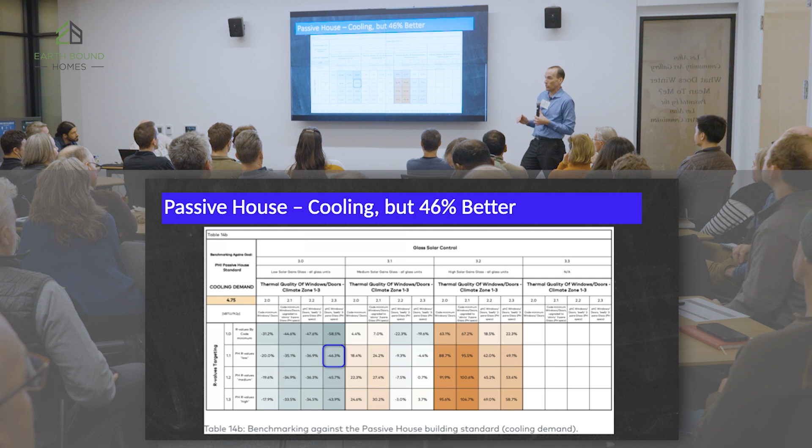16% energy reduction by using solar heat gain glass, 50%. So there's a 34% difference in heating demand in the wintertime, right? Yes. So, if I'm following the differentiation of the glass you're talking about, it does change the quality of the light coming in. It does change the ability for plants to grow inside the house, and it does change the perception of looking out through the windows.

It does. So what this is referencing is something called visual transmittance. So as you add a solar heat gain coefficient that is lower, meaning less infrared light gets into the space, you get a reduction in the spectrum of visible light, right? So your windows get a little bit darker. Some artists don't like low solar heat gain coefficient glass. Most people, when the whole room is in low solar heat gain glass, can't tell the difference.

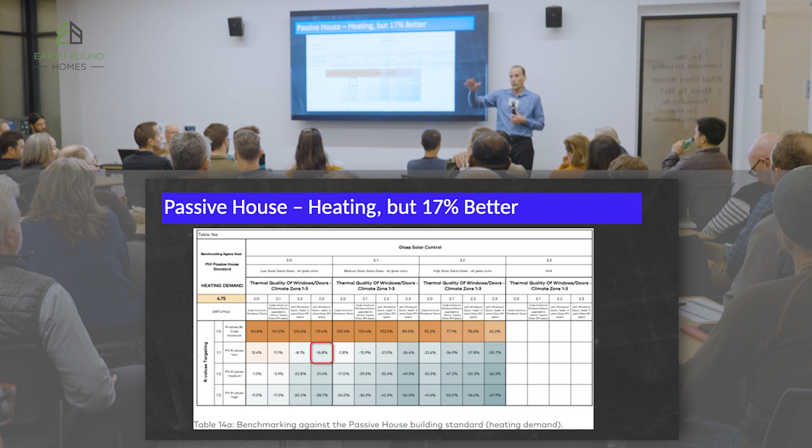What we tell people is to use low solar heat gain glass in strategic ways where you're getting bombarded by the sun and you don't want to be, so you don't have low solar heat gain glass and high solar heat gain glass in the same room or from the same perspective, and then you could use the high solar heat gain glass in other rooms and get that full spectrum. Okay? So we have a slight difference, 34%.

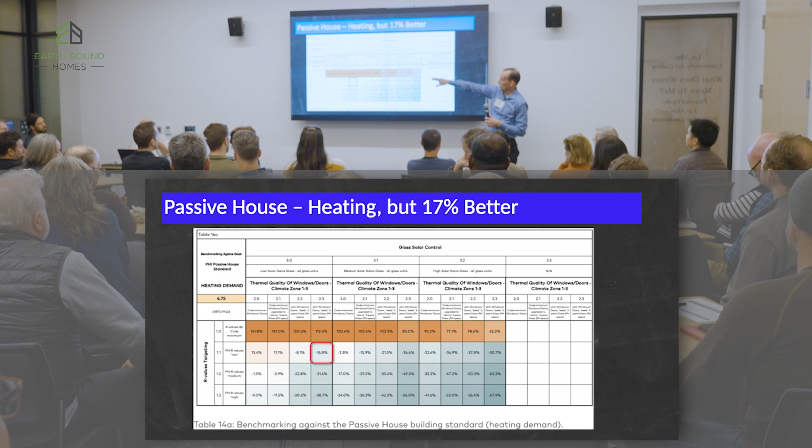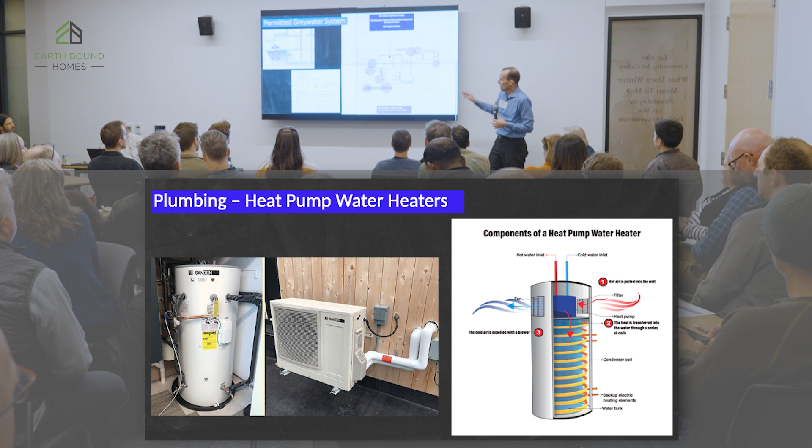Next slide. Gray water system. I love gray water. It is a fantastic way to use refuse water that goes down the drains and would otherwise overwhelm your sewage treatment plant. You can use it to distribute water to your plants anywhere in your yard.

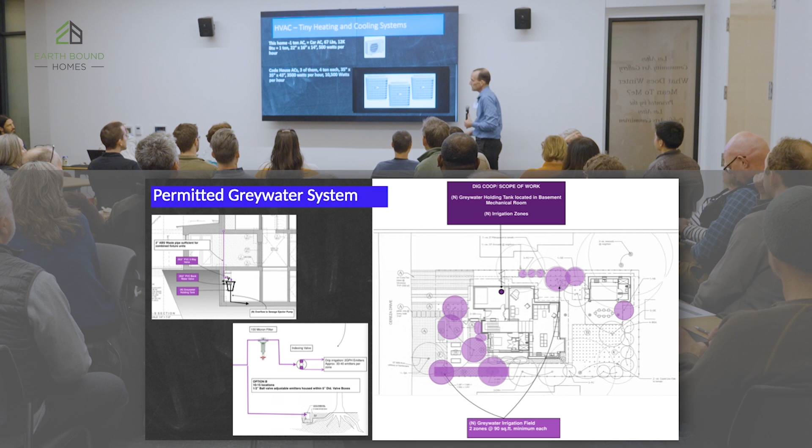Next slide. Okay, if we think about the impact of a normal house and a passive house, for this size house you would need three air conditioning units like this to supply cooling, or you have this one. So this house can be addressed with one mini split head for the entire house. One head for the entire house. Now that doesn't distribute around the house, but that's the total load for this entire house.

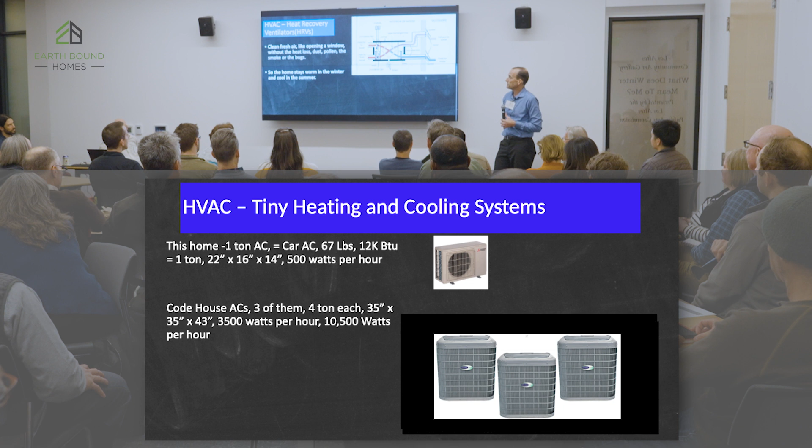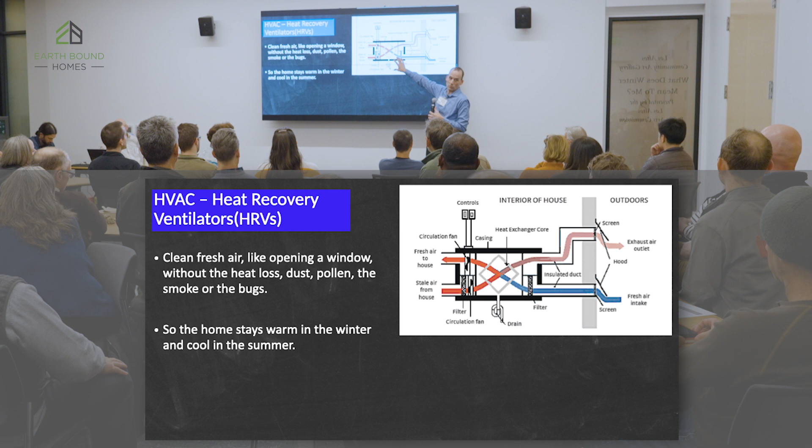Next slide. And this last slide: HRVs. HRVs are about exchanging that air. This is a whole discussion, but basically this is a lot better than opening your window. And they are quiet. They are not like the forced air heating systems of old. You will never hear this unless you have it in boost mode because you're using it as a bath fan or something. Next slide.

Consequences. So why do we care about all this? Well, next slide. There's a lot of learning that goes into these houses, not only in building them, but in living in them. You're going to notice that when you have more people, your house gets warm. Like, oh man, it's the middle of winter and I have four people here, and now I have to open a window or turn on my cooling because it's warm. You're going to notice that your kids smell a lot more. You're going to notice that HRV ventilation is not just nice, it's necessary. Breathing releases a lot of moisture.

When I built my house in Santa Clara in 2005, I had one HRV to service the entire house. Then we closed the doors to the kids' rooms, and they had the audacity to breathe while they were asleep. The condensation from their breath on crappy Andersen windows leaked out and caused mildew on the window sashes. So I put another HRV into their rooms just to deal with the moisture from their breathing. It is crazy what an airtight house will do.

You'll learn about dew point, specifically moisture on big windows. About building science, you'll have to know more. And then normal systems. Radiant heating systems, which is this picture. People love radiant heating systems largely because they're quiet and they keep your feet warm. But you can't turn a radiant system up in a house that's efficient, because you will put too much heat into the atmosphere, and your feet won't get warm. The set point temperature on these floors is typically like 72 degrees, which is not warm on a bare foot, right?

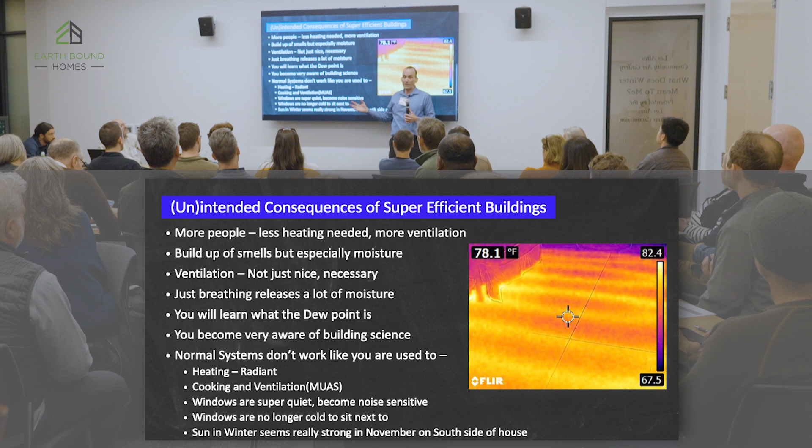Cooling, cooking, and ventilation. You typically have to have what's called a makeup air system if you have a big range hood, or two range hoods. Windows are super quiet. It actually makes you a little bit noise sensitive. You open a window and it's really loud inside. Windows are no longer drafty and cold to sit next to, and the sun in the winter, if you're not shading it, seems like a lot more. If you go outside, it's cold because the ambient temperature is cold. When you go inside, you're like, wow, it's really warm.

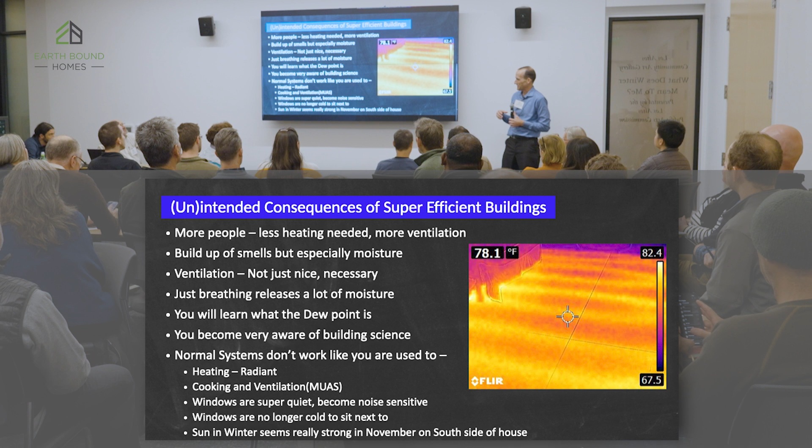All right, next slide. It all works. This is all about us working together, right? If we're not going to work together, we're never going to get this stuff done. I learned a tremendous amount about this whole process from David and his team. It has been unbelievable. I admit that I was embodied carbon agnostic before we started this job. I now am passionate about trying to reduce embodied carbon. I think that this is an incredible process.